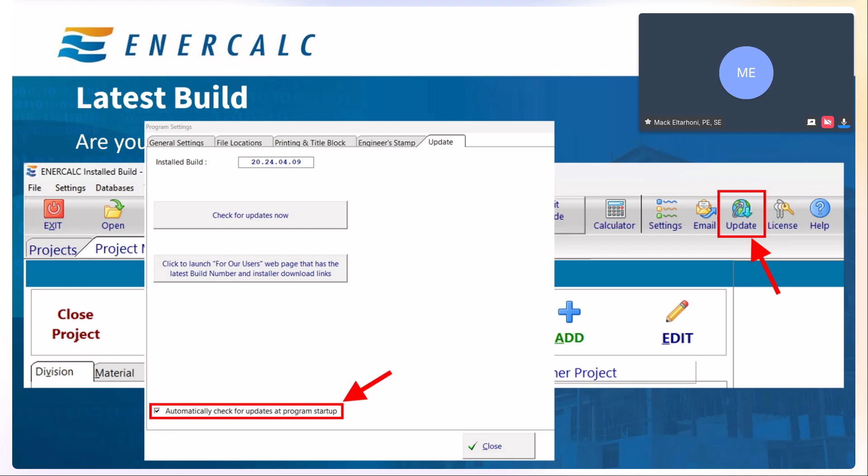The other item we have today is, are you using the latest build of ENERCALC? For those stuck between these builds, build 2023 8/30 (August 30th) all the way until 2024 February 28th, the feature to notify you of new updates does not function properly.

If you're affected, you'll need to do a one-time manual update, either from inside ENERCALC or through the website. If you're on build 2024 March 4th (0304) or newer, this does not affect you and you're good to go. If it does affect you, the process is very simple.

You can go to the update button from within ENERCALC, then click to launch the For Our Users webpage. This takes you to our website where you can download the updater. Once you download and run it, you'll be updated to the latest build. I'd recommend going back through this same process to make sure ENERCALC automatically checks for updates at program startup.

Moving on to the prepared Q&A segment, where we pick a frequently asked question and discuss it. This question, we get a lot: can a user combine calcs from different ENERCALC files?

The answer is yes, but I want to give you an overview. One ENERCALC.ec6 file, your standard ENERCALC file, cannot be opened by multiple users at the same time. This is due to the risk of data loss and data corruption.

However, when multiple engineers work on the same project, each engineer is recommended to create their own ENERCALC file. So I can create my own file that houses 5 or 6 calculations, and my coworker creates their own file for the same project with another 5, 6, or 7 calculations. Once it's all said and done, we can combine all these calculations from the various ENERCALC files into one file.

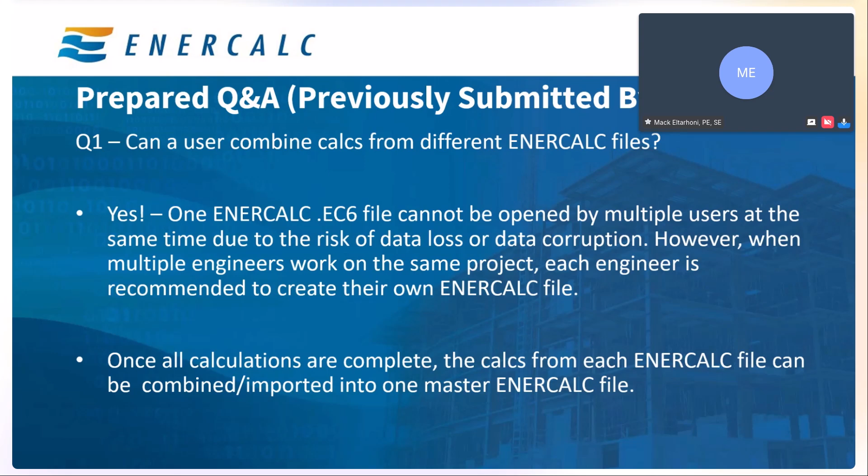We can import them into one master ENERCALC file, and the process is quite simple. You can import calcs by clicking on the 'import from other projects' button right here. And if you click on this question mark button on the right, it will open the user manual, which shows you a step-by-step guide on how to import calcs.

But I'm going to walk you through the process. It's really simple. Once you click on the import from other projects button, you can see on the right-hand side it will get updated to display a lot more information.

First, you can see a summary of the steps right here—a quick reference on how to import calcs. But also on the right-hand side, you can see this note in orange.

There's an important note saying that calcs that have linked loads using load linking—ENERCALC has the ability to link loads from one steel beam to another, for example—you cannot import that chain into another calculation. So it's very important that you understand that.

There is an important note saying that calcs with linked loads using the load linking feature will be imported without the linked loads. This is critical, and it might create problems when importing due to not having those linked loads or calculations. So just be careful how you use this feature.

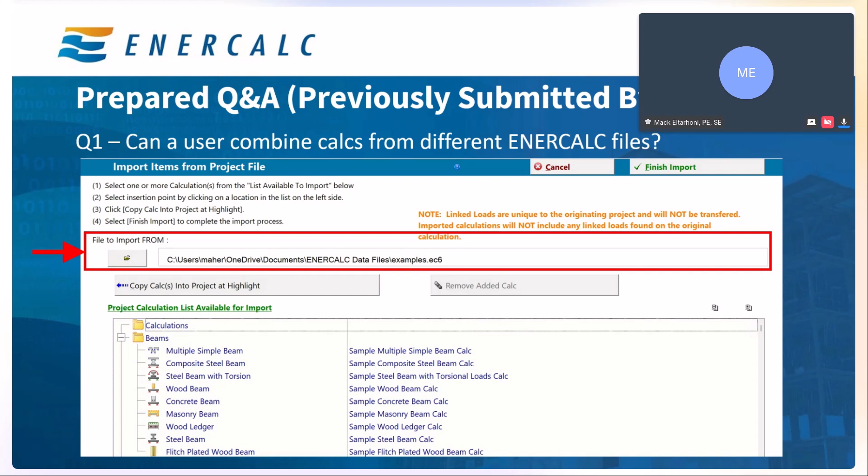Now you can navigate to select the project that you want to import. This is very simple—you just click on this button and then click whatever project you want. Once you navigate to the project, you'll see a whole list of all the calculations housed in that project. You can scroll down and find the calculation you want to import into your current file.

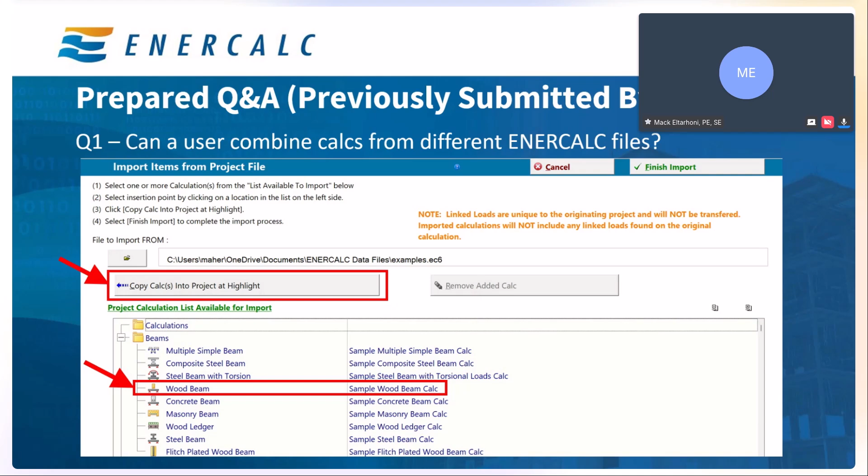For example, we're going to grab the sample wood beam calc. Once you select the calc, you click on the 'copy calc into project' button in the top left corner. Once you click this, you can instantly see on the left-hand side that the calculation you selected appears in green.

It's important to note that the importing of the calc is not final yet—it's just showing it in green to indicate that. It won't be final until you click on 'finish import.' Once you finish import, everything is good to go, and that's the calculation right here—no longer green, and it is in your current file.

You can also use the same process to bulk import multiple calculations, so you don't have to do this one at a time. You can highlight as many calculations as you want and follow the same process: click on copy calc, then click on Finish Import, and they automatically show up in your own current file.

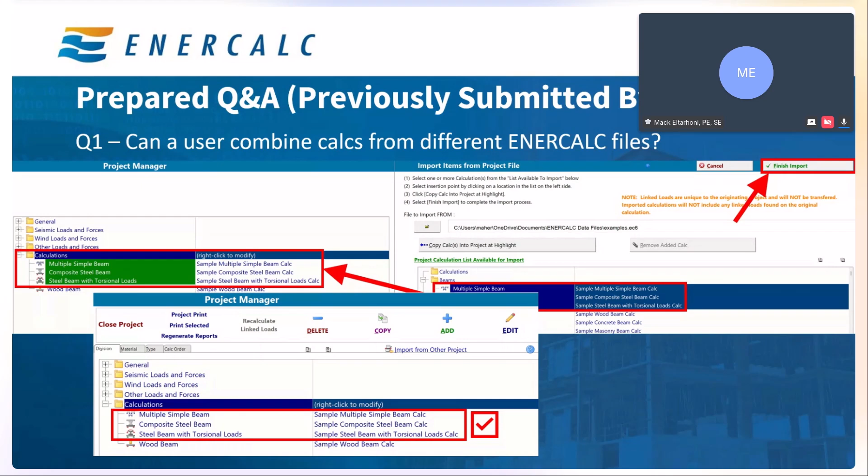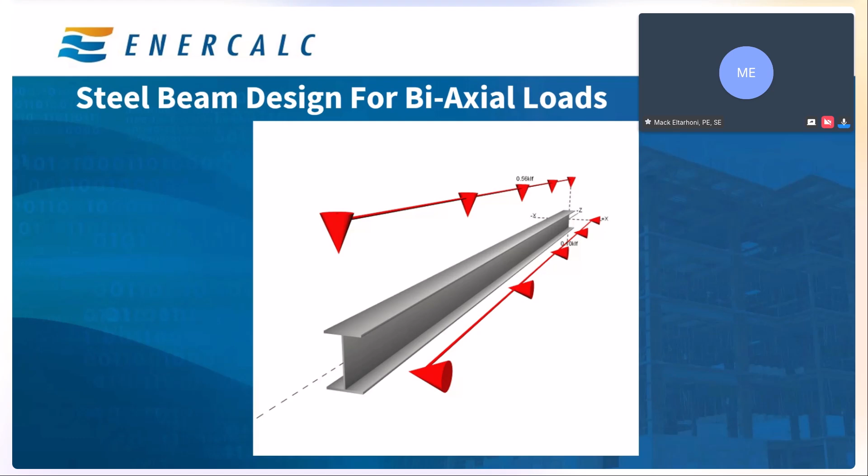Moving on to the next part of the presentation, which is our theme for office hours today: steel beam design for biaxial loads. We get a lot of questions about how to use ENERCALC to design beams that have biaxial loads, so I wanted to dive into this a little bit.

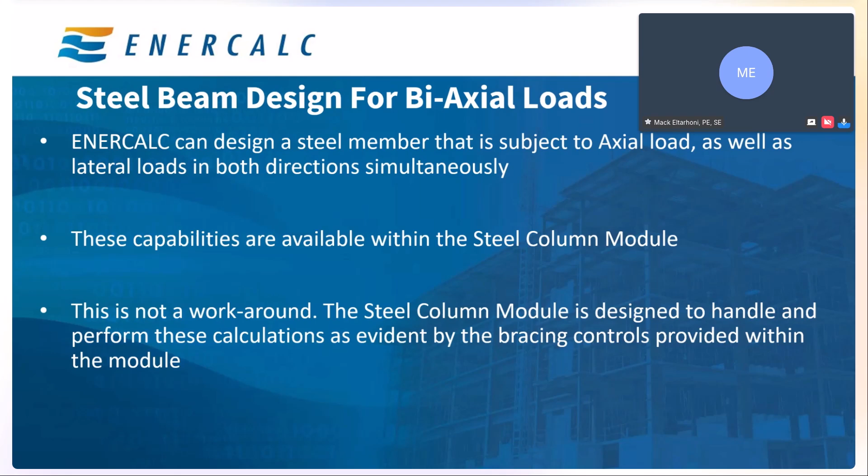ENERCALC can design a steel member subject to axial loads as well as lateral loads in both directions at the same time. These capabilities are available within the steel column module, for example. This is not a workaround—that's very important to understand. The steel column module is designed to handle and perform these calculations, as evident by the bracing controls provided within the module.

I want to take an example of something we do daily, or at least weekly, in our projects, and go through it to show you how to use ENERCALC to design this header. This is a very common design task. A lot of times if you have a large opening that's very tall, deflection criteria might be stringent, so cold form steel might not be the solution, and you'll have to install an HSS member, or a hot rolled steel member, that acts as a header. We'll walk through the process of designing this example, then do a live demo to showcase other features this example didn't illustrate.

So here's a sketch of what the opening looks like. To set the given information: we want to use a header type that's a tube, so we're trying to use an HSS. The wall width is 8 inches, so we can use a tube as wide as 8 inches, as long as it fits into the wall. The header span is 17 feet, and the bottom of the header is at 27 feet above finished floor.

Once you do the wind calculations, we know we have a lateral load of 555 PLF, ultimate load, 1.0 wind—that's lateral load from the window—and a dead load, gravity load from the weight of the studs and finished material above, of 100 PLF. We also know we don't have any axial bracing, so the unbraced length for axial buckling is the full length of the member, 17 feet, and we don't have any bracing for the compression side of the header. So for lateral torsional buckling, the unbraced length is also the full length of the member, 17 feet.

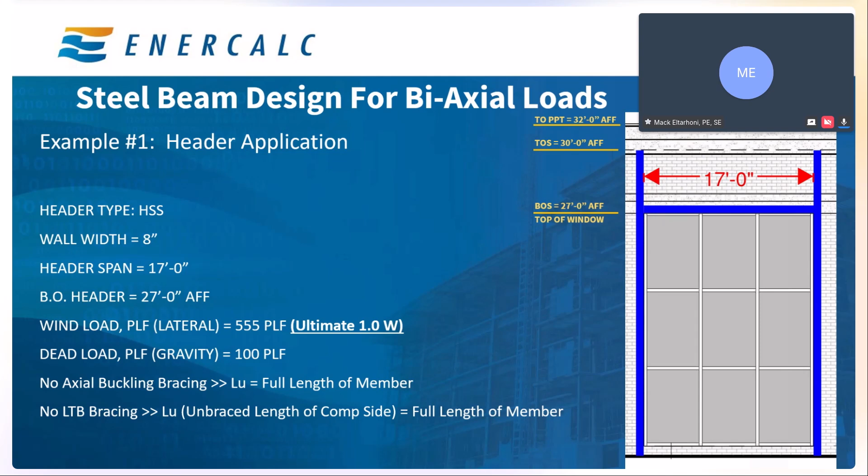So first, we start a new calculation by following the standard process. You click on the Add button, then the Columns tab, then the Steel Column button. We start left to right, the standard process from the General tab, working our way through the various tabs. Starting at the General tab, we give the calculation a name.

Below that is an input for overall column height, with a note that it's used for bending analysis, not slenderness. For beam type analysis you need the full length to determine the maximum applied load or moment, while slenderness calculations like KL over R require the unbraced length, which might or might not be the full column height. So we need the full column height for bending analysis, while slenderness is controlled separately using a different tab with multiple options. In our case, the header is 17 feet, so we input 17 feet.

Next, we need to determine the end fixities. This also affects the beam type analysis as well as deflection and reactions. The end conditions for the slenderness calculation, for KL over R, are determined separately in the slenderness tab, giving the user great flexibility in their design. In our case, the header is pinned—no translation, but free to rotate—so that's the condition at the top, bottom, left, and right: pin, no moment restraints. Moving to the bottom portion of the General tab, this has standard design information such as ASD versus LRFD, and your Fy and modulus of elasticity—for this case I'm using 46 KSI, but you can use whatever matches your own specific material.

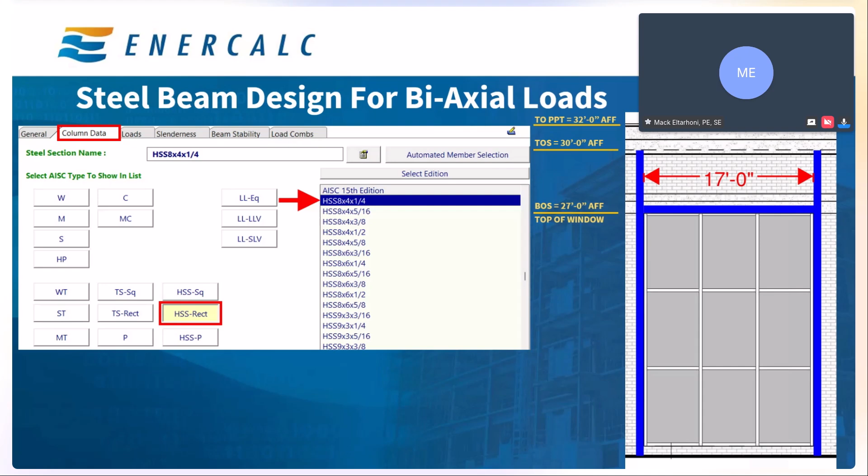Moving on to the next tab, we select a size to start from. I'd like to go with an 8x4, this way I'm filling the cavity of the wall and taking advantage of it. So it's an 8x4 by quarter, and we want it long side horizontal—and for the visual learners, this is the orientation we want, long side horizontal.

Next is the loads tab. You can apply axial loads as well as lateral loads in both directions. In our header example, we do not have any axial loads. We only have gravity and lateral loads, so we will just focus on that. Both the gravity and lateral loads are just lateral on the X and lateral on the Y, nothing axial. So we will just focus on this tab.

On the bottom right, you can add, copy, and delete loads. Once you click on the Add Load button, you will be prompted to select a load type from this drop-down menu. You can apply fully uniform load, partially uniform, point loads, partially uniform loads, point loads, and concentrated moments. So I'm going to start by applying a fully uniform distributed load to represent the gravity loads from the wall assembly above the header.

The first thing I do is put a nice description of the load that I'm putting in. In this case, I'm going to put gravity load for the self-weight of framing above header. The value of this load, as we remember, is 100 PLF, so that's equal to 0.1 kip per foot. And it is applied as dead load. Then you need to select the direction of the load.

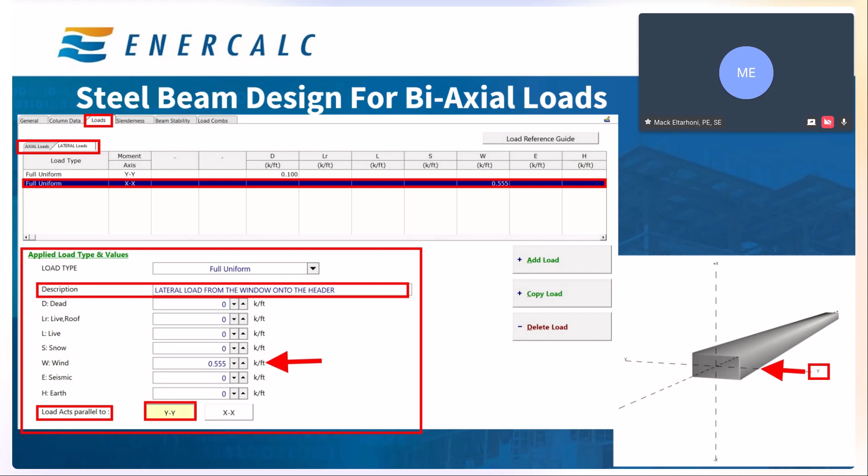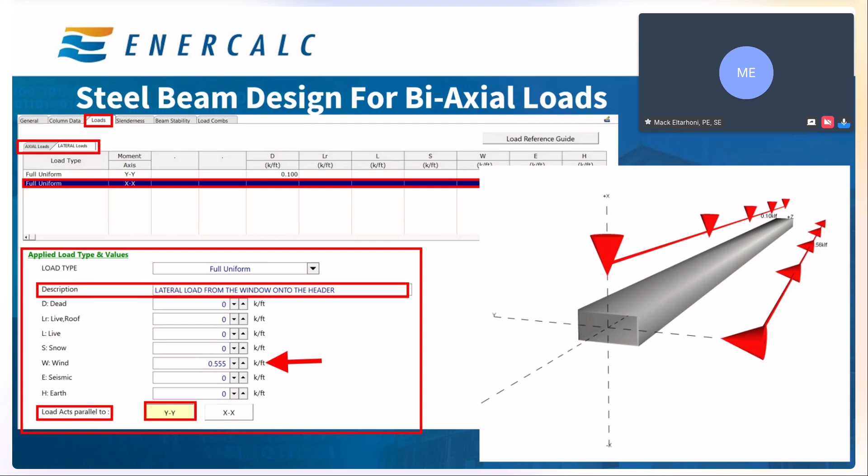So once you apply the loads, this is actually what the 3D visual looks like from inside ENERCALC. Once you apply the 0.1 right here and the 0.56 kip per foot, that's exactly what they look like. Again, this is just a quick sanity check for you to see how your loads are applied, if they're applied in the right direction and in the right orientation.

It is also worth noting that all of the loads that you apply on a member are summarized in this table right here. You can see this is the load that we applied, that's the dead load, and then that's the other one that has the wind load. Again, this allows the user to see all of the loads that are applied and cycle through these loads very easily.

Now, if you're ever confused about the sign convention that ENERCALC uses, and just want to quickly reorient yourself, you can simply click on the load reference guide button on the top right corner, this button right here. When you click on that, you will get this pop-up window that shows the sign convention in great detail. This is the sign convention that we use for this module.

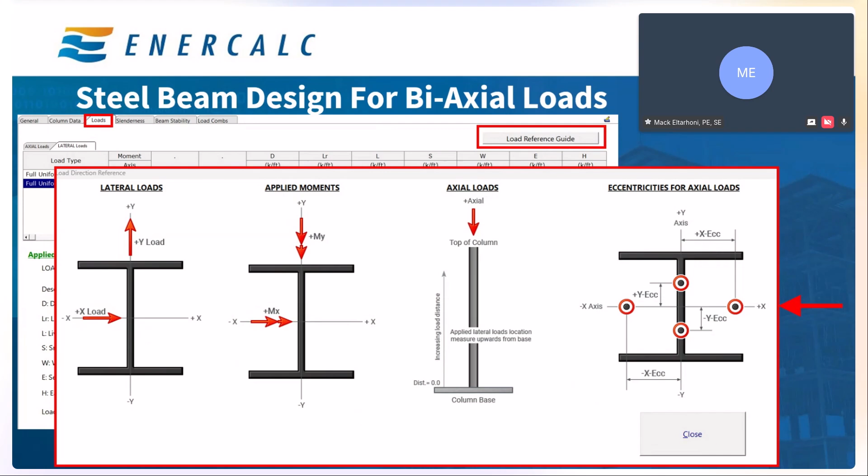So the next tab is the slenderness tab. In this tab, you can assign bracing condition for axial buckling, which is also known as Euler buckling. You have the option to specify bracing conditions about the x-axis separately from your bracing conditions in the y-axis.

So in this tab right here, once you pick your X and your Y, you have controls for the X and for the Y, so the user will have full control over bracing. You can pick if the member is fully braced, or you can select a K factor based on the standard predefined conditions, such as pin or fixed pin and so forth. You can input your own K factor if you don't want to use the standard configurations.

Lastly, you can calculate the K factor using the adjacent members, and ENERCALC will help you perform those calculations. You can also directly define the unbraced length, LU. If you click on this one right here, you can specifically choose what you want the unbraced length to be, whether 10 feet, 5 feet, or whatever you want.

Also, you can select the use overall column height option right here. When you select it, the program will then multiply the K factor that you picked by the overall column height to determine the unbraced length. This LU, or unbraced length, will be used to determine the axial capacity of the member, of course, in determining the slenderness ratio, the KL over R, for each direction.

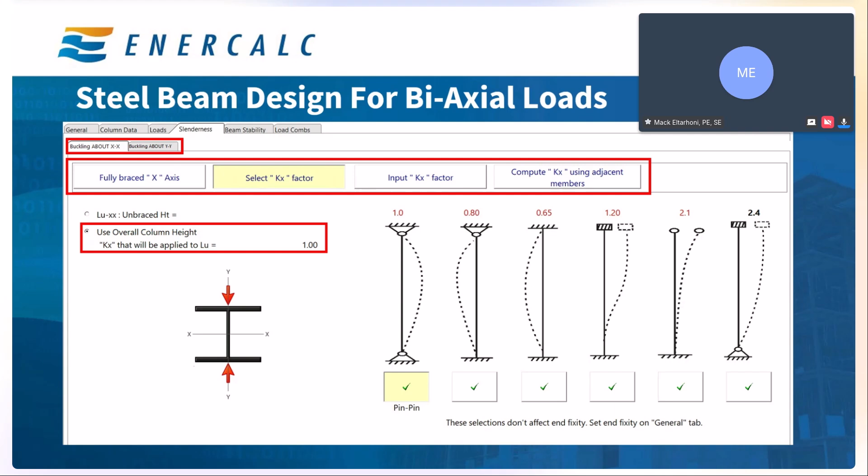We move on now to the next tab. This is the beam stability tab. Here, we're prompted to assign an unbraced length for the calculation of the flexure about the XX axis. This is critical for lateral torsional buckling. So if we have a normal column subject to only axial loads, then this tab does not really affect the capacity of the column because the column is only subjected to axial loads. Only slenderness would matter in that case.

However, when a column has lateral loads, then we will see a beam-like behavior in terms of flexure. Hence, the equations for typical beam bending design actually apply. ENERCALC allows the users to control beam bracing for flexure calculations separately from the slenderness bracing, to ensure that users have great flexibility to reflect the bracing conditions that they want.

So in our header example, it is important to determine the unbraced length that controls the flexure design. In this header case, of course, the full length is considered unbraced length and will have to be used fully. So therefore, we're using 17 feet.

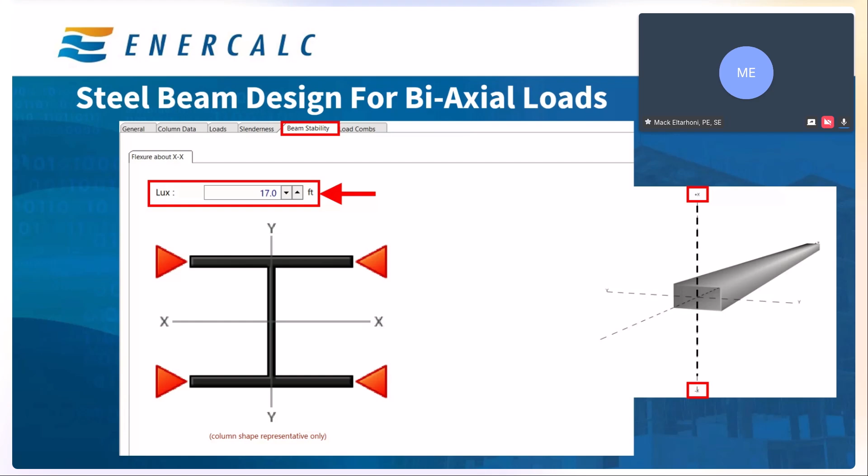Just to take the discussion a little further, if there were joists framing to the top of this header, spaced at 5 feet on center, and if they're bracing the compression side of this header, then there's nothing preventing me from taking advantage of this. As a matter of fact, I will take advantage of this and use the unbraced length for flexure, the beam stability, as 5 feet instead of 17 feet. Again, this is a tube, so it's not a big deal. But if this was a W-shaped member, for example, this would definitely have a significant impact on the bending capacity of the beam.

Lastly, as usual, the last tab is the load combinations tab, and you can select to run whatever load combinations you want. For the sake of this example, we're just using standard IBC 2018 load combinations, and we're just having everything run normally, all of the combinations.

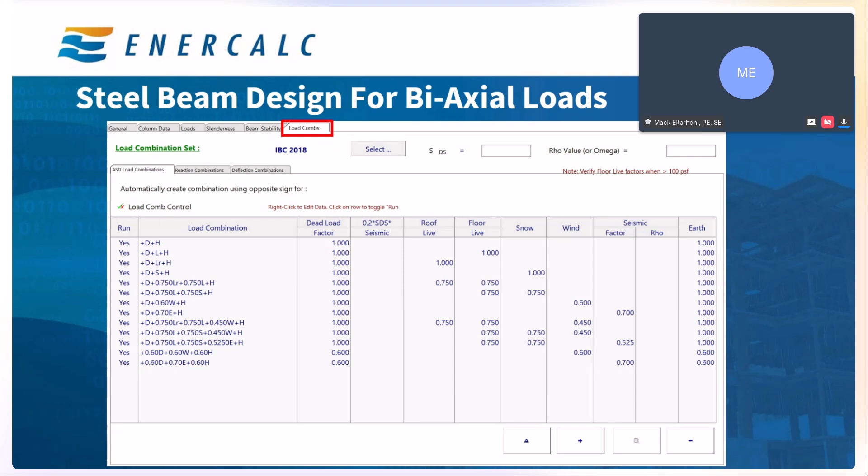So this concludes all of the design data that we need to input. And at this point, we are ready to evaluate the results.

So under the Calculations tab, you can see a summary of the results. You can see applied loads as well as allowable capacities. You can see the applied loads right here, and then the allowable capacities. And we're using ASD design here, so you can see the ASD allowable capacities.

You can clearly see that we have axial load 0. It's still calculated the capacity, but the applied axial load is 0. However, we do have mx and my, so we do have these loads applied, in the biaxial direction. You can clearly see that again, there's no axial load, and that's why it's 0.

And at the very top right here, the results that are reported, or the controlling result that's reported, is the combined result, because you have multiple loads coming from different directions. So the combined value is here, 0.5859, which is of course less than 1. Hence, the design is safe.

Moving on to the next portion here, you can see the maximum lateral reactions along the X and the Y directions. The results are displayed for both sides of the member, so the top and the bottom if it's a column, left to right for a beam. But you can see the maximum reactions in both of these directions, the X and Y.

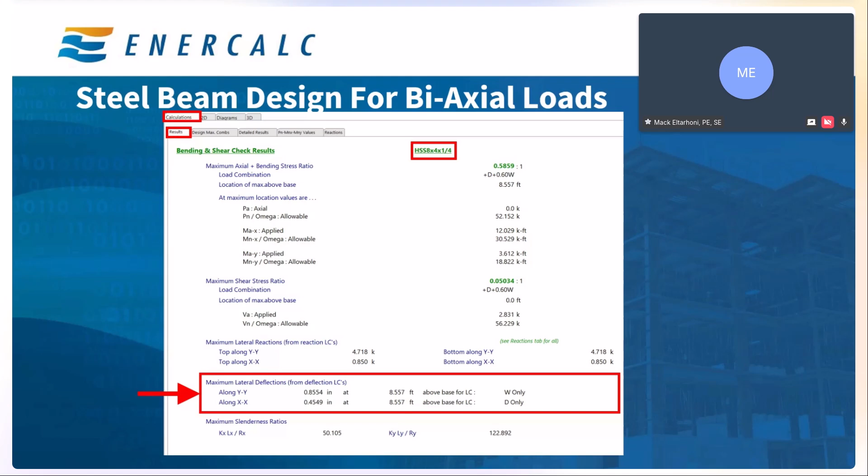Another useful output is found under the Diagrams tab. One of the things that I like about the diagrams is that most structural engineers like to see what the moment diagram looks like, what the shear diagram looks like. That's kind of our sanity check. We have an expectation of what it's supposed to look like, and we want to be able to see that the final diagram actually reflects what our expectations are, and if it's not, then we want to investigate further.

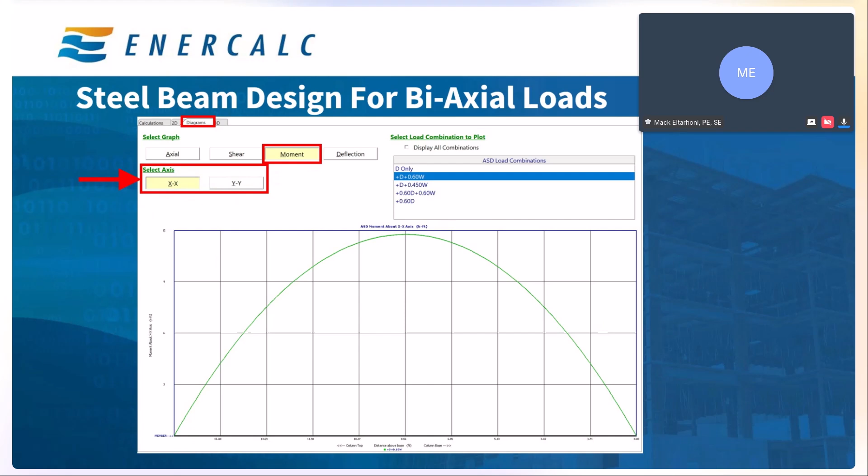But in this case, for example, you can click on the moment here, and you can select the axis that you want to see the moment for. So this is the X and this is the Y. So you can see all of that information displayed for you to evaluate the results.

So in conclusion, the steel column module is designed and fully capable of performing calculations on a steel member that is loaded in all three directions, X, Y, and axially. Granular bracing controls allow the user to determine bracing conditions for Euler buckling, just axial loads, as well as bracing of compression side for lateral torsional buckling, which is typical beam behavior.

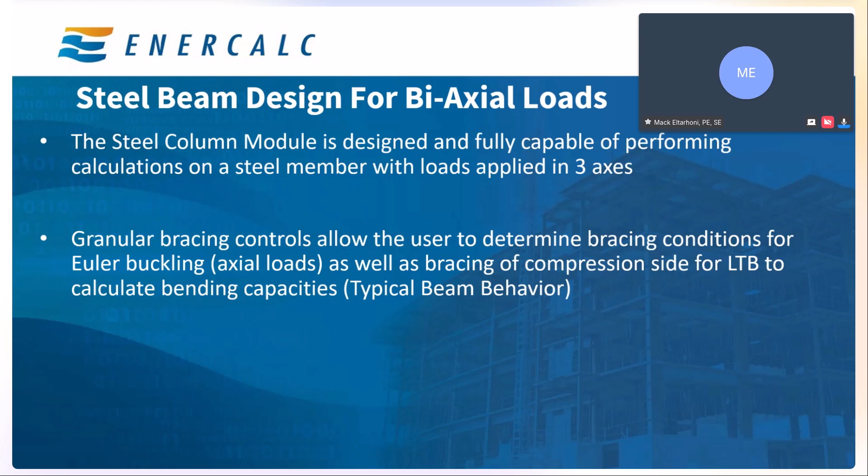So with that being said, I'm ready to jump over to do a quick live demo because I want to show a couple of things that are critical that this header example did not cover.

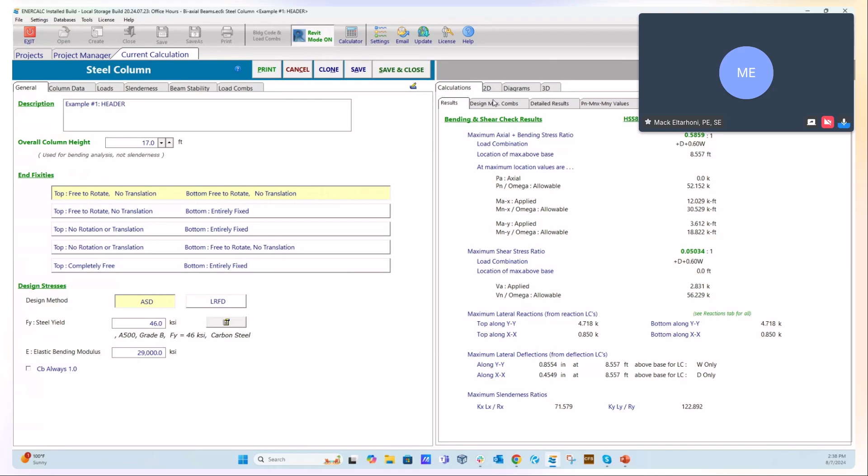So this is the header example that I was talking about right here, and this is the 2D tab. You can see the loading along the Y, loading along the X, and of course you can see here the cross section. All of this information is normal information we just went over.

This is the part that I want to show you, give you a little bit of information about. This is the axial loads tab. Within the axial loads tab, you can add a load.

And for example, maybe I want to add 2 kips. And you can see that the load is applied right here. Along the z-axis, this is the load that's already applied right here.

And what you can do is add the column self weight if you want, but since this is assumed to be a header that's taking axial load, the self weight is not going to be applied axially. But what I want to show here, and that's very critical, you can have a point load that's applied to the top of the column. You can have it applied maybe at 5 feet, a very specific location.

But more importantly, what I want to show you is this right here. This shows you the eccentricity.

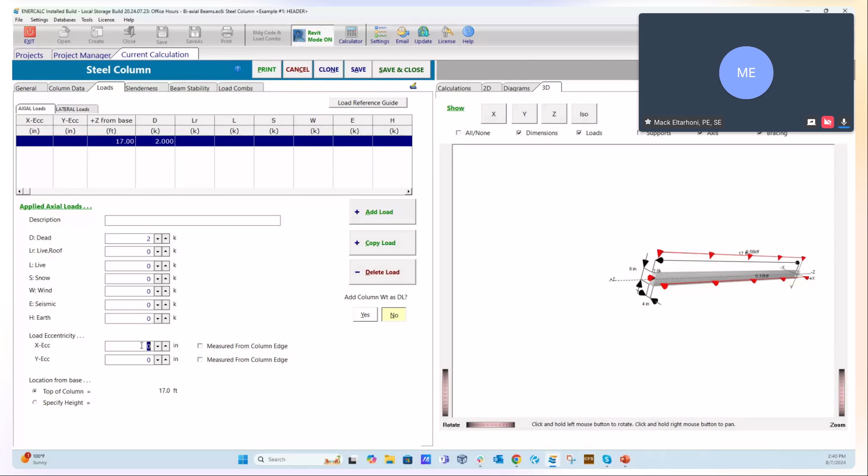So you can apply the column loads concentric on top of the column, or most of the time we don't have that. A lot of times you have a beam that frames into a column, or maybe in the header example, if we have a shear wall on top of it, then the load will really be applied to the outside face or the top face of the beam.

So that's why it's critical to apply these loads with the proper eccentricity. For example, I want to apply it maybe 2 inches measured from the edge of the column. So you can see right here how this load changed. Let me do 0. If you want the load applied directly at the face of the column, then it's right here.

If you want to apply it at the center of the column, you can see that this is dynamically changing to show you that it's applied at the center. If you want it to be applied at 3 inches from the face of the column, then you can just click right here and you apply it there. And if this also has a Y eccentricity, say 1 inch from the center, then it's like that. If you do it from the face of the column, it'll push you all the way up there.

So you have a little bit of extra controls. ENERCALC will know to take the axial components of this, apply it to the column axial capacity, and then it knows that there is now a moment being induced, and it understands if this moment on the column is being induced in the x-axis alone, in the y-axis alone, or there is a portion going in both directions, and it will figure out what that component is and applies it accordingly.

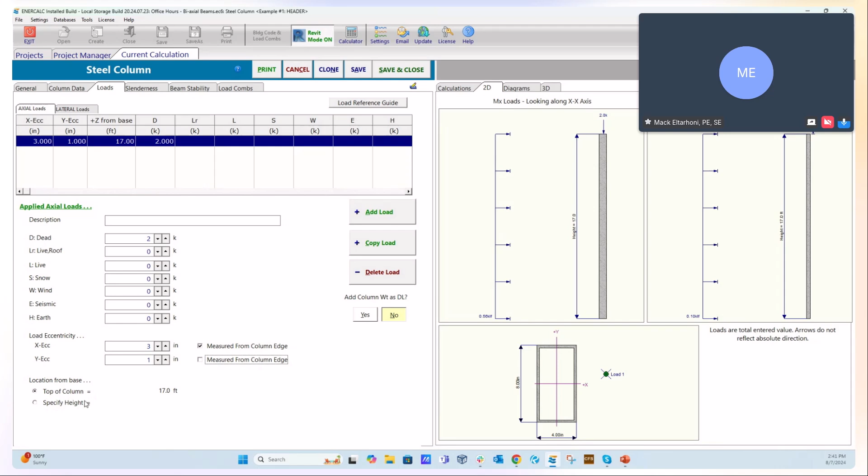So that's kind of the part that I wanted to show. And again, this is a quick load reference guide. This will show you how all of the loads work, what we assume as a positive direction and negative direction, just to give you a better idea.

And you can add a bunch of axial loads right here. And again, this is the lateral loads that we just talked about. You can choose whatever you want, and you can apply it parallel to whichever axes you would like.

The slenderness, just to go through these: the first option is obviously saying it's fully braced. Second option is determining your own unbraced length. This way it doesn't do any calculations, it doesn't consider K, it doesn't do anything. It takes your unbraced length, your LU, directly from there.

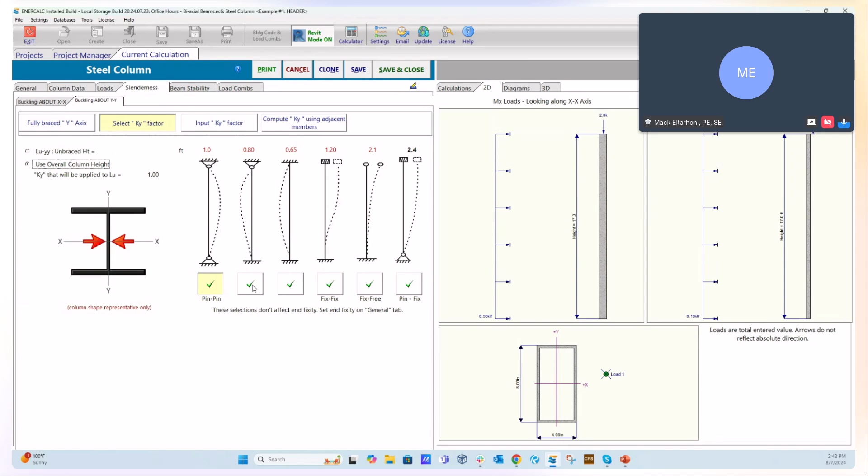Or this is the option that we elected to do, which is use the overall column height and just multiply it by the appropriate K factor based on what we select. So if I selected this, for example, then it knows to switch it to 0.8 instead of 1, based on what we use here.

Input K factor - this is if you want to put a specific K factor that you've already separately calculated, that's not one of these standard ones. Maybe you want to put 0.85, for example. You can just come into this tab and say K is 0.85, and it will perform the calculation properly.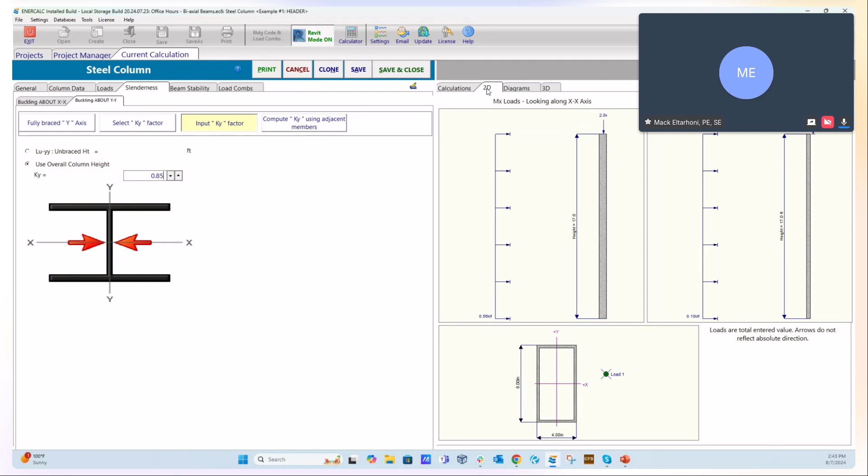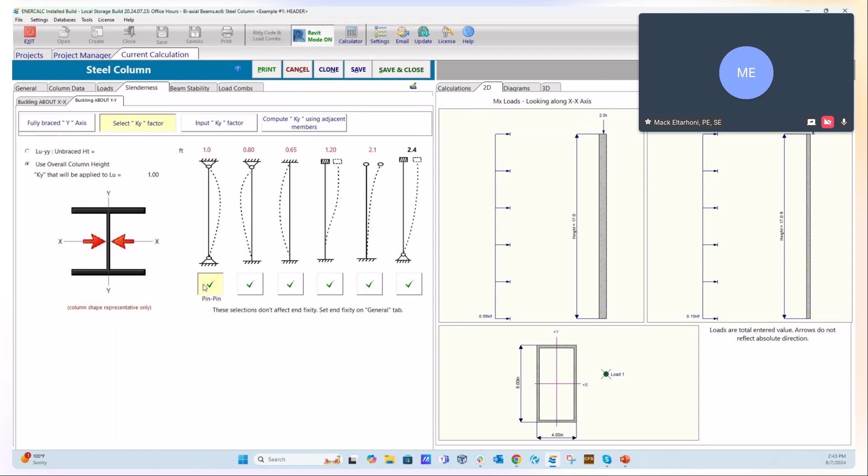And then lastly here, this is the portion that helps you compute the K factors based on the adjacent members. You can do all kinds of stuff here, but this would help you quite a bit in running the calculation. Most of the time, this is sufficient for what most engineers do, especially on single-story and two-story buildings. And again, this is the beam stability, and those are load combinations.

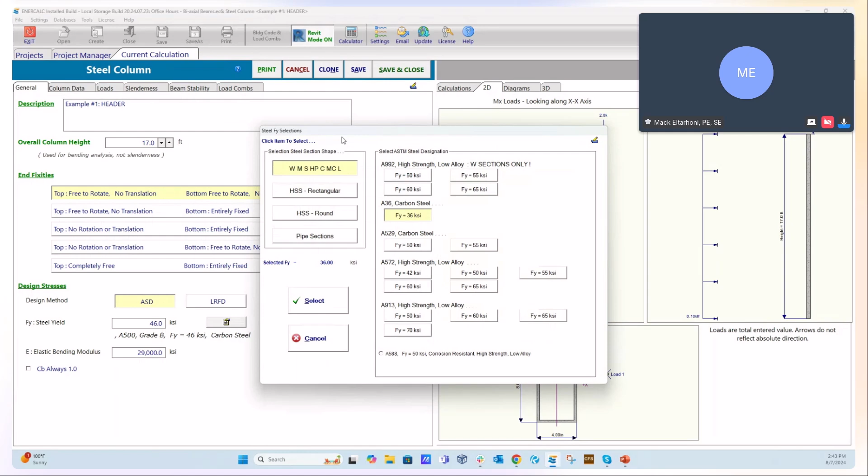This is also another thing that a lot of people are not aware of. This button right here is useful because a lot of times you can just come right here and see the various available materials. So this is a quick reference - instead of having to go and look it up, if you know what material you want to use, you can reference this quickly and pick whatever material you want from here.

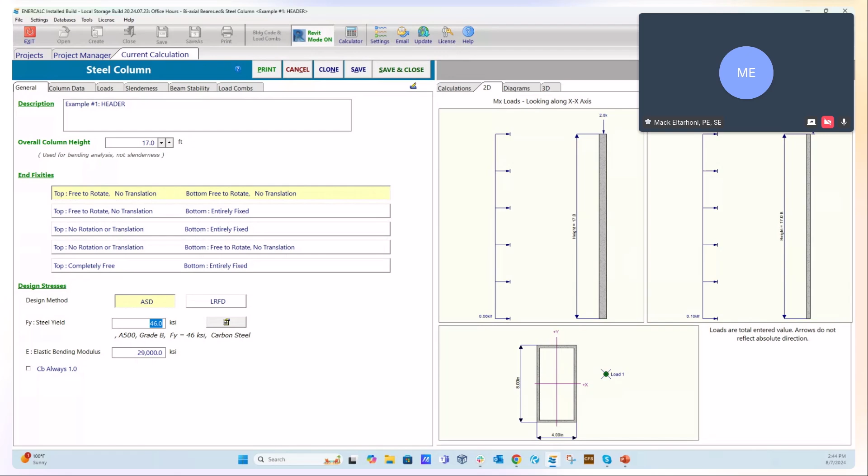So this pretty much covers the various controls that we have for the steel column module.

Is load linking available for wood structures? So load linking right now is available only for steel beams. However, let me share my screen. It is currently available in steel beams, but we are working on implementing it in pretty much all of our modules. The thing is, we can't implement everything at once. So we like to hear what our users have to say.

If you see right here, the ability to link reactions from columns or even from other calculations, wood or all of that stuff, is still being introduced. So what we want people to do is jump on this load linking survey. If you click on start, this would allow us to know what people want to see first in terms of development, and the more requests we get, then that particular module will get the priority.

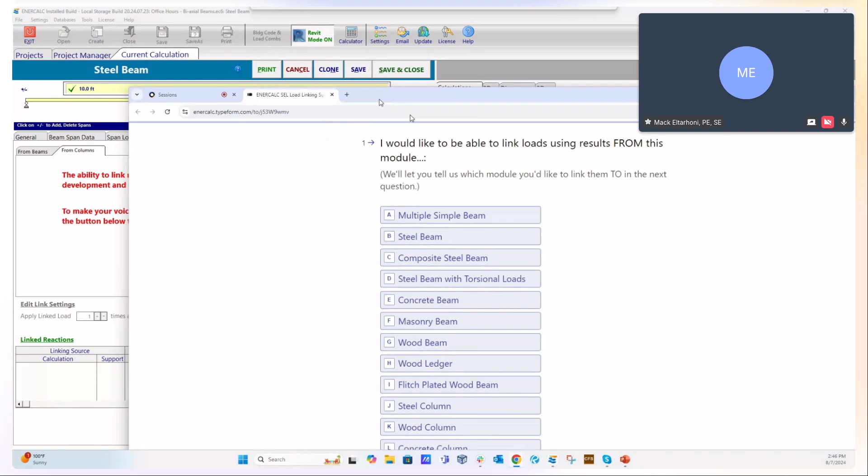So again, right now we do not support load linking in wood beams. However, that is something we're planning on doing, and we're just going to see what people want us to implement first, right after we're done here with the steel beam implementation.

All right, perfect. Going down the list here. A question from Jonathan: will ENERCALC allow beam bracing in both XX and YY directions for biaxial loading in the future? So this is a good question.

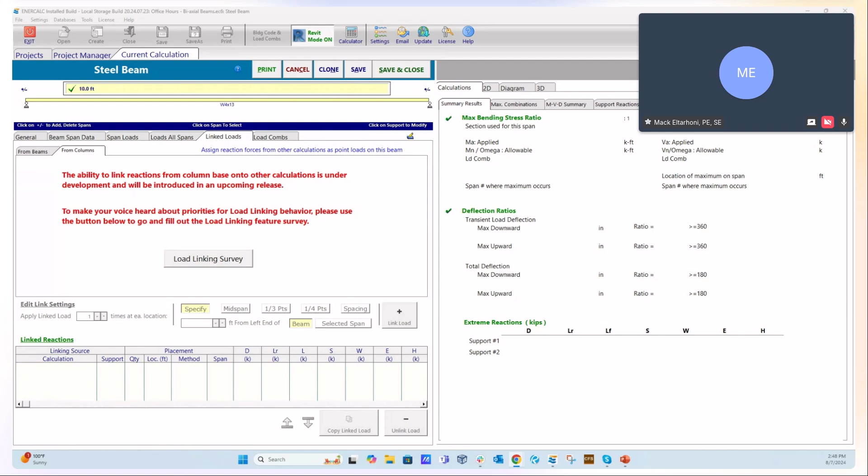Mack, feel free to chime in on this. As far as I'm aware, it's not all that common to run into a steel section, or other types of sections, that are subject to lateral torsional instability about two axes simultaneously. So the primary focus of the lateral torsional bracing controls in the example Mack highlighted is primarily on the one axis that would undergo lateral torsional instability. For wide flanges, that's typically the strong axis, because in the weak axis there is no instability. There are some cases with HSS sections where, with extreme aspect ratios, you can get lateral torsional effects, but that would only affect the one axis with the extreme aspect ratio, not both axes simultaneously.

Mack, do you want to chime in with thoughts on that? That's absolutely correct. You have that question on screen right now. Can you see? We go to beam stability - yeah, this is exactly what it's for. So this says flexure about the XX axis, which is the strong axis.

That's where lateral torsional buckling is going to control. Even if you have an HSS, if it ever controls, it's still going to be in the primary direction, in the strong axis. That's the slender part - it's not going to be flat wise, it's not going to control. That's why it wouldn't serve much purpose to have the ability to do that in the other direction, because it's not going to control. That's what I'm trying to say.

Perfect. Okay, a question from Joe: it looks like you have brick veneer in your sketch for the example - what about torsion? Let me go and put that.

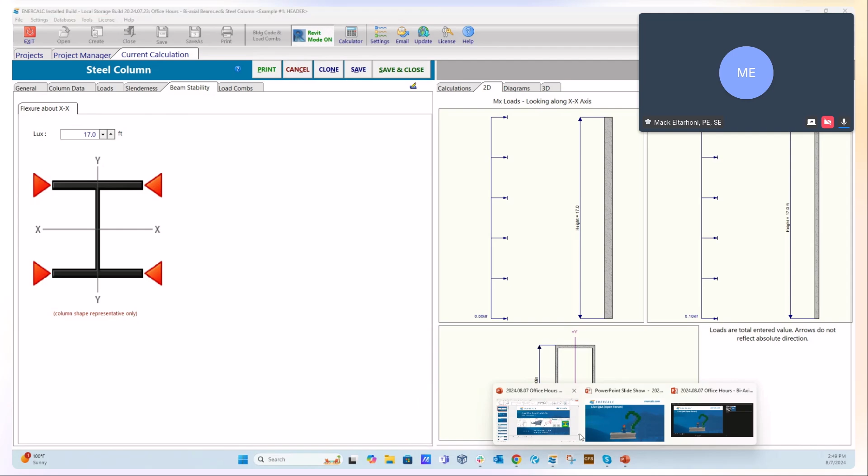Yeah, let me get you back here. For the purpose of our example, I was actually ignoring the torsion from the brick veneer. I was even ignoring the weight of the brick veneer, because I'm only putting 100 PLF. So in this particular case, the steel column module will handle biaxial bending and axial loads, but it will not handle torsion - that's not something it's capable of doing.

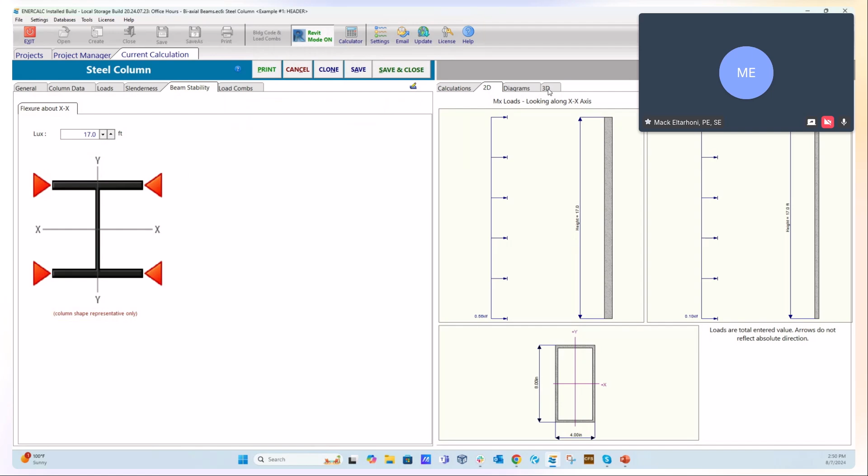Perfect. Okay, question from Senchit: can you also show how you made the tube turned long leg horizontal? Correct me if I'm wrong, but since we're using a biaxial column behavior to synthesize this calculation, that has to do with load directionality, correct?

Well, actually what I did - the default of this is going to look vertical. As far as the display, I want to answer two parts: the display part and the load part. For the display part, the column is going to start like this. You can flip it and do it however you want to help you get where you need to go.

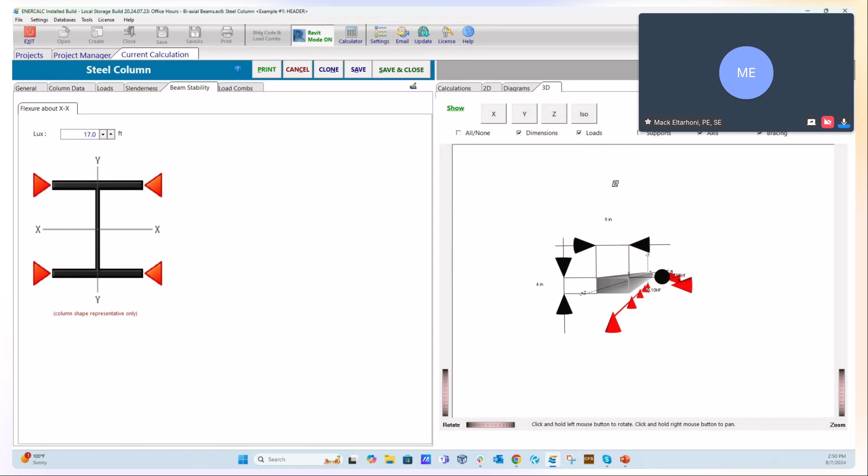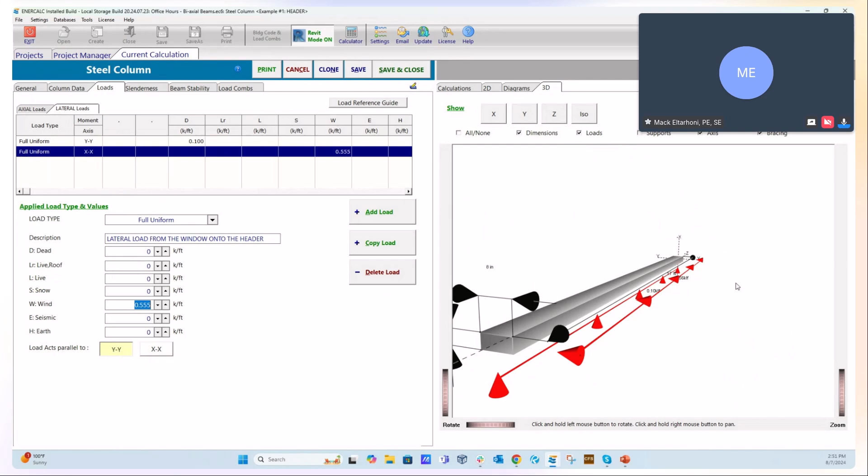So for example, I'm reorienting this to look like something that I'm familiar with. Now I can see the X direction here, the Y direction here. Now I have my bearing a little bit, I understand what's happening, and I can apply the load right here. When it says the load is applied parallel to the X, I know it's applied in the weak axis. If it's parallel to the Y, then I know it's applied in the strong axis. That makes sense because we're applying the 555 PLF along the strong axis while applying the 100 PLF only in the weak axis.

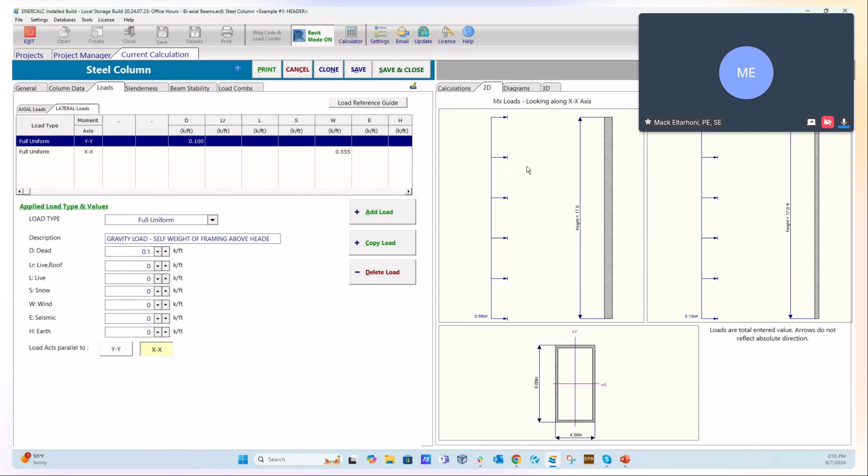Now, more importantly, this right here in the 2D tab is very clear on what the strong axis is and what the weak axis is. The direction of X is the weak axis, and the direction of Y is the strong axis. So I know how the load is applied. For example, the gravity is going to be in the weak axis of the HSS, hence it's going to be parallel to the X. What I did that's a little different, and I think it helps everybody, is that I come here in the 3D and reorient it like this.

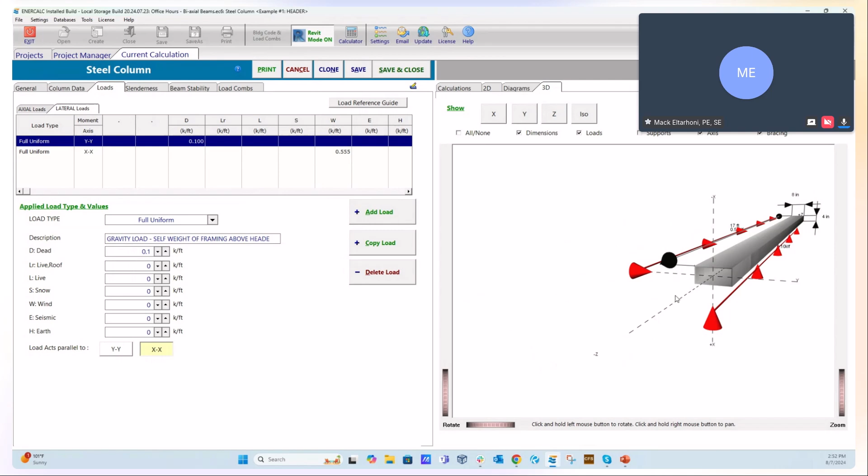So I'm always looking at it. Let me bring it here for you. You can see the x-axis. So I'm always looking at it in a way that's the right orientation for me. I see the X, I see the Y, and I apply the load as I go. So it's not like we're telling it anything or telling it to flip anything. Everything is done the same exact way. I'm just flipping or manipulating a little bit the 3D rendering, and using that to help me figure out how I need to apply my loads.

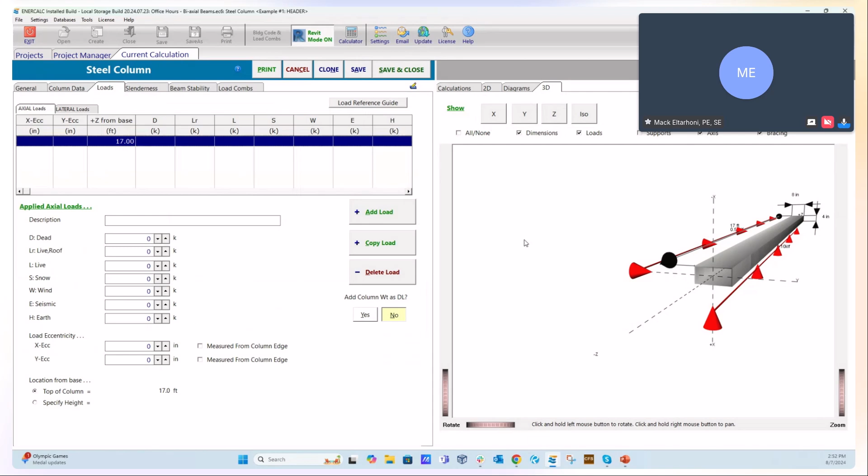Perfect, here's what I'm alluding to. In the steel beam, if you go to a regular steel beam calculation, we have a specific option that says the beam spans in the minor axis. This is right here, so this one already flips the beam for you. However, in the column module, we don't have that. We just keep it, because if you're trying to flip the beam and then have to deal with flipping the axes, it becomes too much. So in the columns, we don't have an option to tell it to flip or rotate the member. You just take it, manipulate it however you see fit, and apply your loads based on the manipulation you chose.

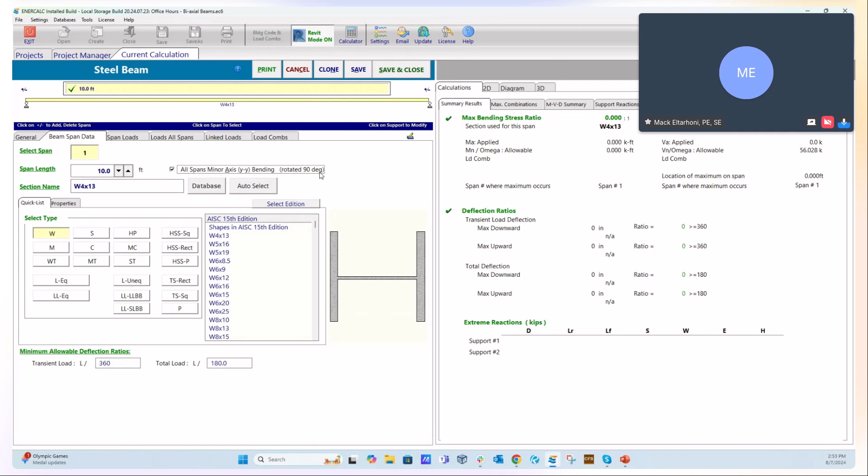Cool, all right, next question. Go ahead and put this one up. It's a little bit long, but I'll read it out for you. Under load combinations, there's an option to add SDS and a rho value, rho or omega. Does that make any difference to the calculation? For example, a cantilever column, etc. I did use rho, but it doesn't seem to make any difference in the calc.

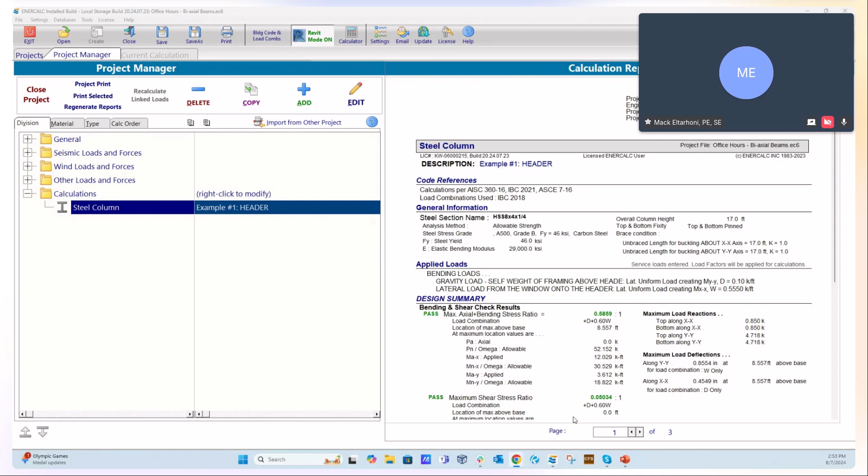So the rho or omega factor that you can apply in your load combinations is a multiplier with the existing seismic factor that's in the first factor column. So if you add something in there, it's multiplicative with whatever you have for the factor that's already been applied. So if your seismic is the controlling case and you apply a rho or omega, then you'll definitely see a response in your resulting unity check, your deflections, your behavior of the column.

It could be in your case that seismic was actually not the controlling case, but definitely you will see the effect of that rho or omega factor, because in Mack's example right here, if he goes ahead and fills that in, you'll see it populate in the rho column on the far right hand side. What will be applied in your actual combinations would be multiplicative between the factor column and the rho column, like the building code specifies. So in a case where you have lateral behavior or axial behavior strongly governed by those seismic combinations, then you would probably see that in play. But feel free to reach out to the support team if you have more questions about that.

I saw a question here that I want to just jump to real quick. Let me actually bring this one up. Okay, not this one, I think I grabbed the wrong one. It's this one here.

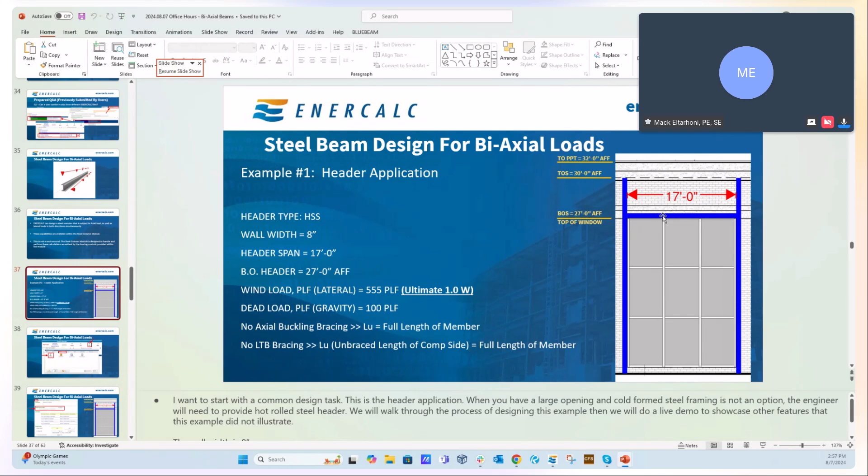So this one right here says unbraced column height appears to be 27 feet, but 17 feet was used in the calc. I just want to make sure we're on the same page - I'm not trying to design the column, I'm designing this header right here, so I'm not messing with the column at all. The header span is 17 feet, and that's why we're using 17 feet for this header design. We're designing this header within the steel column module because that module is designed to handle axial load in addition to biaxial bending. But yeah, 17 is for the header - we're not designing the column at all.

Question from Silas: does automatic member selection work with the beam column design? The beam column design he's doing here is just using the traditional beam module, and any process that uses standardized library-based design - whether standardized AISC sections or standardized NDS sections for beams, columns, etc. - you should be able to see that in action just like in any other module.

If you're having any difficulty with that, reach out to the support team and they can drill down and see. You'll want to make sure you're on the latest build. And if you're seeing a bug or unexpected behavior, definitely reach out to support@enercalc.com to get more detail on that.

I just want to show this here real quick, at least to give people an idea, because a lot of people don't know about it - you have the automatic member selection, and you can do a variety of things. For example, if I want to use a rectangular HSS, I can run a depth limit up to this much, I can run a depth class, I can do a variety of things. I can even limit it by a maximum stress ratio that I'm okay with, and then you just click design, and it goes through the various options available.

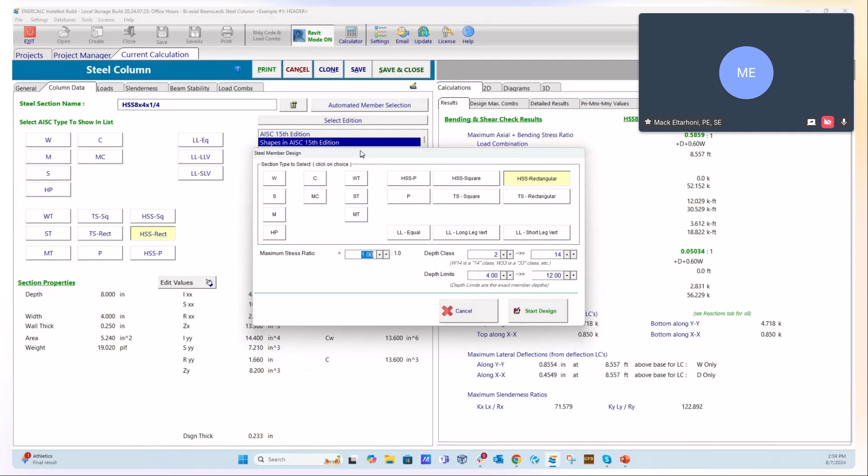I want to go ahead and hit one more real quick while we still have a little time before the end of the hour - just to hit another question from Joe.

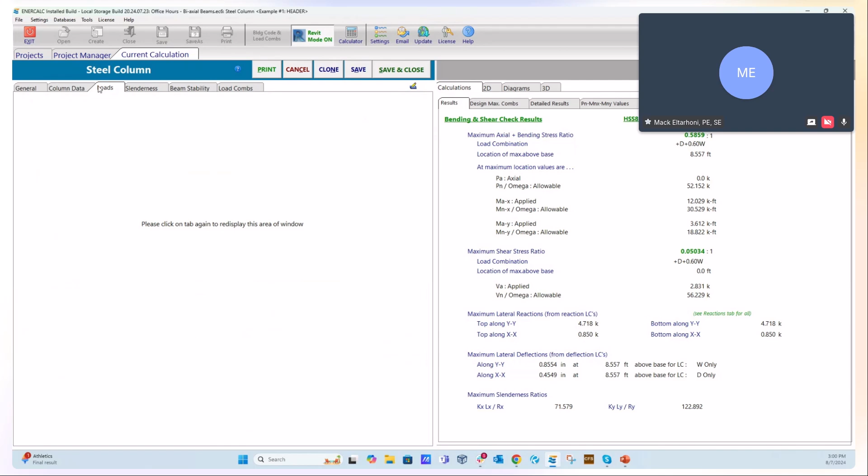Do you have to manually change dead load when changing the beam size? What he's referencing is in our traditional beam module, where you have a fixed orientation for that beam, you can accommodate the dead load associated with self weight automatically. In this case, since we're using an arbitrary orientation and orienting manually with our load directionality, he's correct that we would need to manually adjust the external applied load to consider the fact that the section size has changed. So within your dead load, you can account for that - you can apply it externally as an additional load, or add it to your dead load and put it in the right orientation you need, which in this case would be along the x-axis.